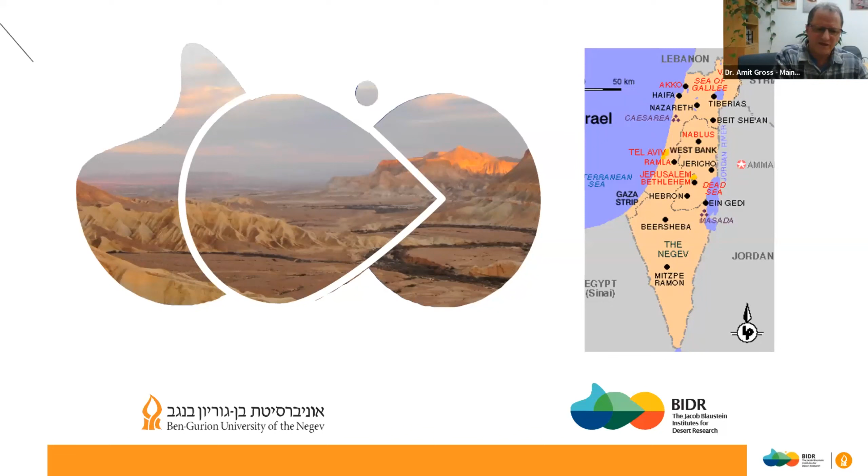The Ben Gurion University has a campus in this area. Our main campus is in Beersheba. It's a major city, but we're a smaller campus, only graduate studies, and it's called the Blaustein Institutes for Desert Research, where we are 3 academic institutes. You can see one is to do with agriculture and biotechnology. The other one that I'm directing currently is the Zuckerberg Institute for Water Research, and then the Environmental and Energy Research, which is doing solar.

And basically, most of our studies are related to food, water, and energy because they're all interconnected. And obviously, greywater is part of it. We're about 300 students currently, about 70 researchers, and only graduate students.

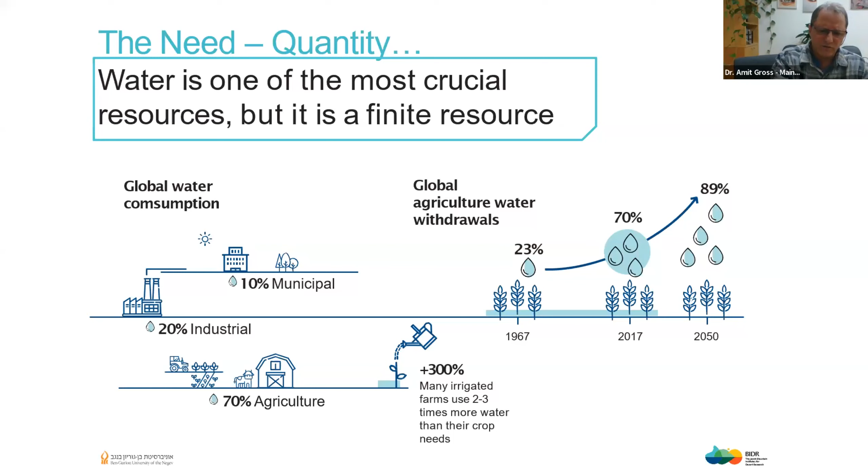I would just mention that there is lots of room for improvement in our current use, and much of it goes with agriculture. And you can see that as of now, we pretty much irrigate about 3 times more than the plant needs. So we're very inefficient. And as you can see in the right-hand figure, the demand by agriculture will be nearly 90% very soon. So much of the effort should probably go into this direction worldwide. So that's about the quantity.

Every few seconds, a child dies from water-related issues. Lack of adequate sanitation, fresh water and fish, the natural habitats are declining, etc. So I know that there is a good chance that many of you are familiar with that, but it's really important to stress this when we go to talk about this topic.

And now I took a slide from Glen Daigger that just talked about the water issues, and basically part of the reason for that is probably that we actually planned all our systems about 100 or 150 years ago, when global population was less than 2 billion. We mostly lived in rural areas and we were lacking modern technology.

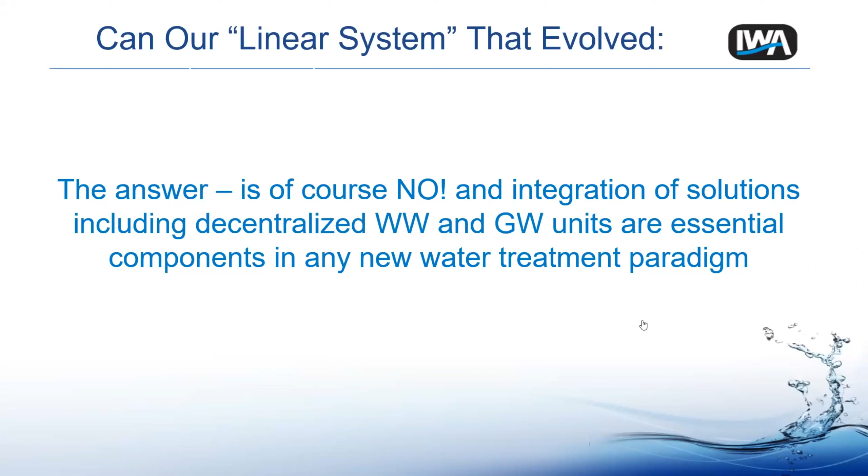Yes, are we connected back? We got lost, I feel. I saw my, am I? Okay, great.

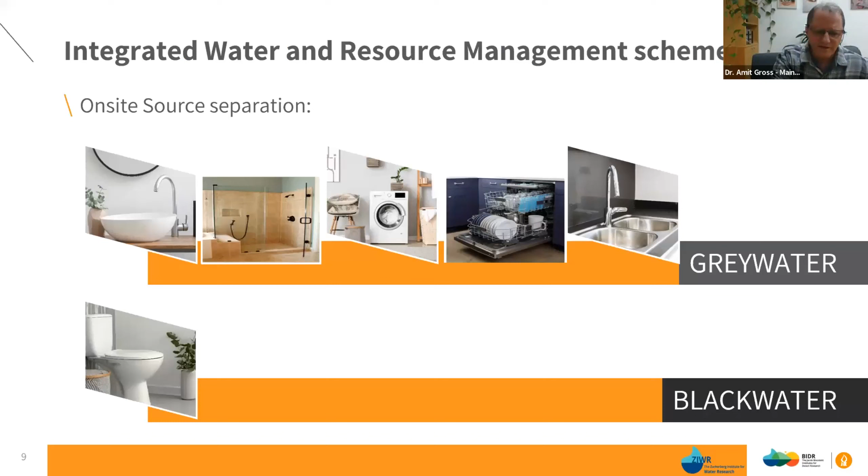So, we're going to go over and see this decentralization, or part of this integrated system, in this presentation. And obviously on the domestic use, we can separate on-site the gray water, which is the shower, basins, laundry, kitchen, dishwashers, yes or no, it depends who you ask and the context. And the black water, which is the toilet water, and that would be the topic of, and we'll go over that.

So why gray water? You surely know, but again, in order for this to be the baseline, I would say that obviously it can save quite a lot of water, maybe up to 50 or 60, sometimes even 70% of the water volume, and less than that of the water cost on a household level. And here I want to mention that I will not get into that much, but it's very different if we're talking about a household or a very small area, or a multi-story building, or a neighborhood. So the sizes are very important, but we'll not touch that too much.

We will relate to gray water reuse on the on-site or smaller scale size of things. And you can see that even when we say gray water, there are different places, and in each place people are producing more or less, typically according to the economy of the country. So you see that in Jordan, which is a country nearby us here in Israel, the average consumption per person is 50 liters of gray water per day, whereas in the US it's almost 5 times more, with 225 liters per day, and in Israel it is about 150.

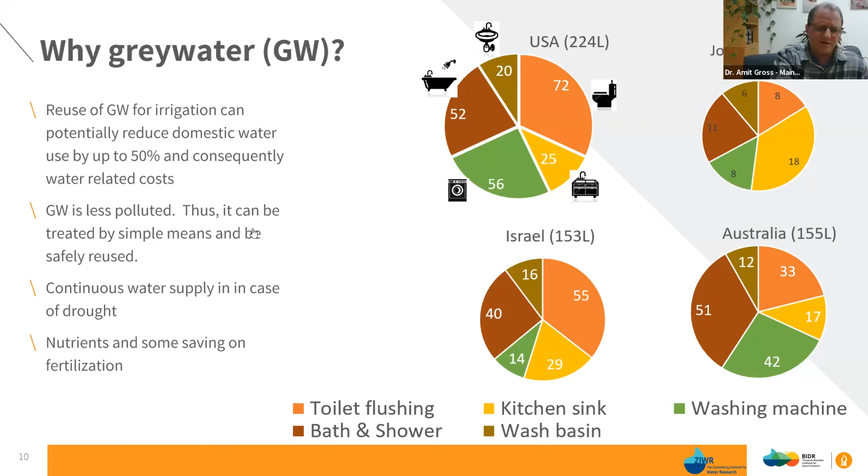So why gray water? It's much less polluted than the full domestic wastewater, because it doesn't contain the fecal matter. It can supply water even in droughts, because we always consume water. For example, if we want to use it for garden irrigation, we may not have enough water in our house or in the country because of drought. But still, since we're going to use it in the home, we can then use the treated gray water in our garden. And obviously it contains some nutrients, and that is another advantage. So these are probably the major advantages. It can save some money if we do it correctly.

But there are quite a few challenges in gray water reuse, and I would divide them into three major ones. I'll start from right to left, and one is physical. I don't know if many of you ever thought about it, but let's assume that you live in a house where the pipes and all the sewage are designed for a certain amount of water, and the flow is designed to contain the toilet, and now we remove 50, 60 or 70% of the water, because we take the gray water away from these sewage pipes. Then what will happen to the excretion? Will they flow to the sewage? So this is one issue, and I'm not going to talk about it a lot today, but I would like you to remember that.

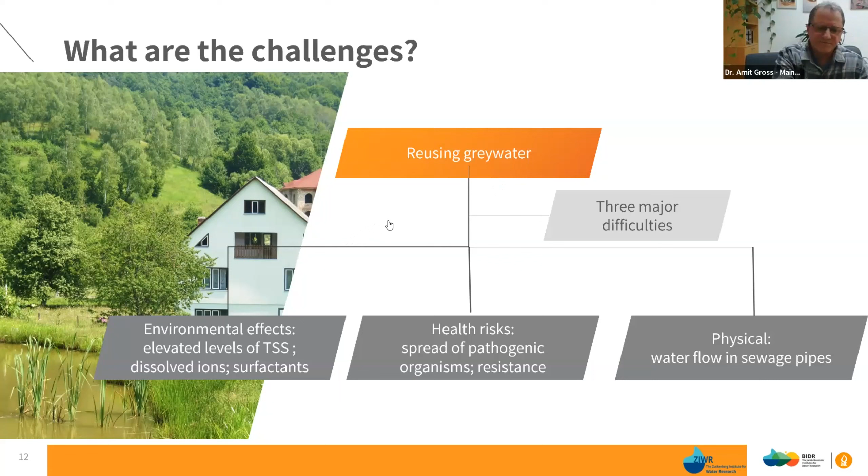So these challenges are out there, and they must be treated very well, I think, before greywater can be reused safely. And that's not the case in many places in the world, but we'll discuss that as we go. I already mentioned that, and I said that we'll not mention it too much, but again, I want to emphasize the difference between on-site or small scale and centralized or larger scale units.

Because in larger scale or centralized wastewater, even if it is greywater, in centralized systems water quality and quantity is pretty uniform. And it doesn't matter if someone leaves the house or there are visitors coming, because overall there is a large number of people that supply wastewater. So the quality and quantity can be predicted quite well.

Where we are working in smaller places, if a family, let's take it as a farm, okay? If the owner of the farm leaves their house for a holiday, then there is no greywater at all. And if visitors are coming to this place, then there can be 5 times more greywater in terms of quantity. And also the quality changes. And that changes on a daily basis and over time. And this is extremely important, and I'll show you later on why.

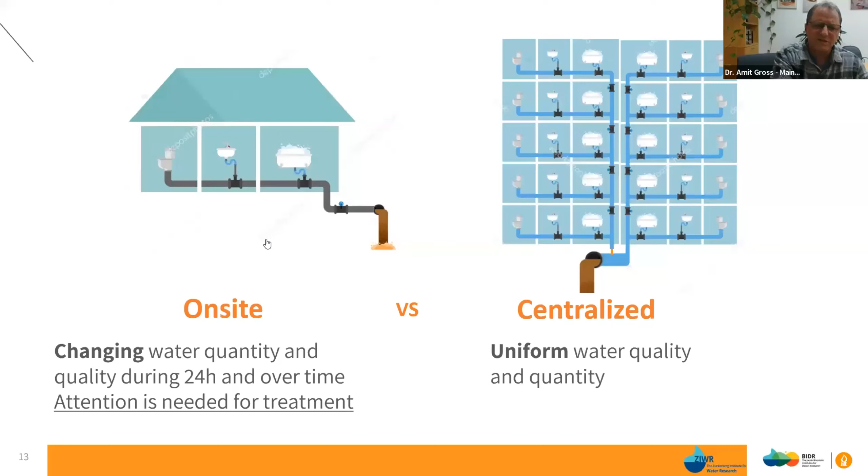So just over a day, the quantities are changing, and this is very important for treatment, because many of our wastewater or greywater treatment systems are biological, and the bacteria, I know that they didn't read the book, but they don't like these changes. They want something uniform, and these kinds of things are quite problematic. So this will be the quantity and how it affects.

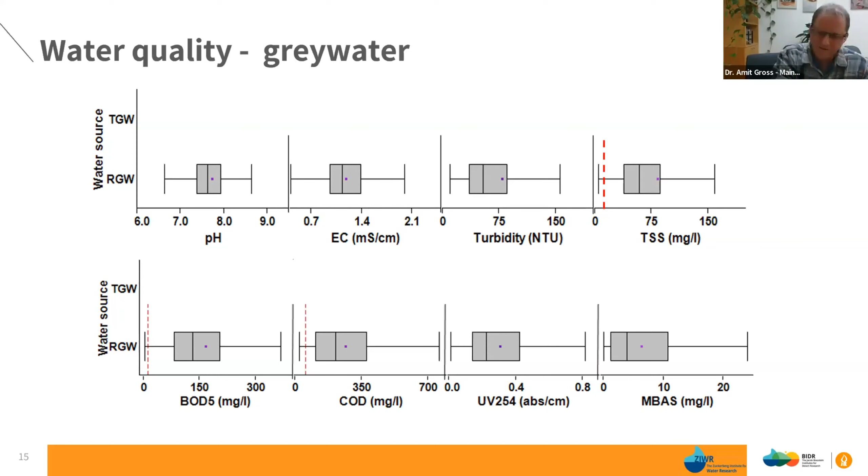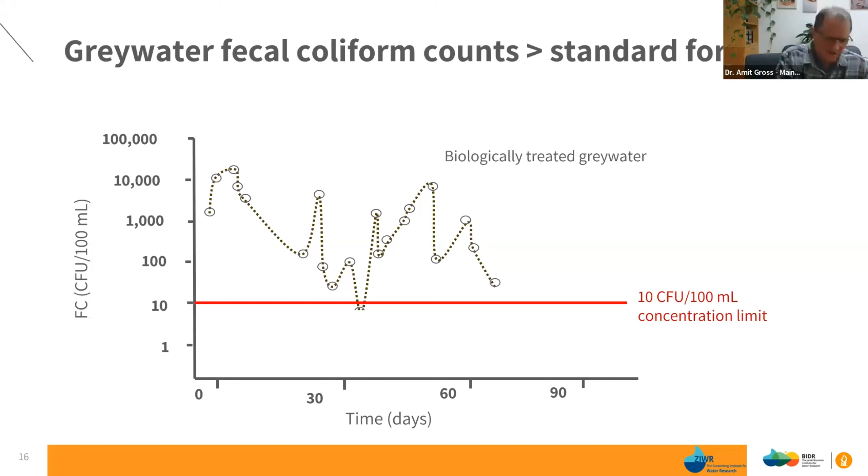The same thing is with pathogens, as indicated here by fecal coliform. And what you can see is that even after biological treatment, but not disinfection, the range of bacteria is anywhere between 10^2 fecal coliform per 100 ml to 10^5 fecal coliform per 100 ml. Again, the difference and the change is dramatic.

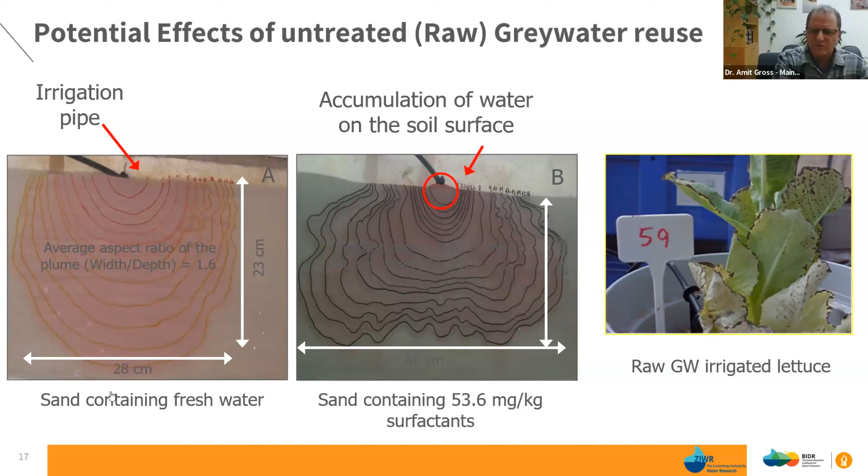So we took the surfactant concentration that we found naturally in one of our studies, and we irrigated with just normal greywater. And what you can see, look at the circle, is the hydrophobicity that was created on the soil. So after a while, the sand became hydrophobic, and that's just because of untreated greywater reuse. And you can see the lettuce that doesn't look very well. We chose lettuce because it's a fairly sensitive plant, but when you use raw greywater, you might have issues with the environment and the plants if it goes for irrigation.

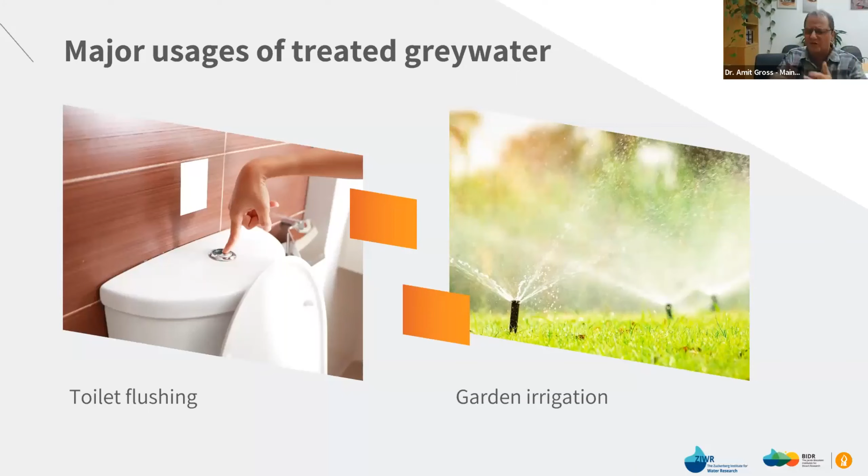I would just remind you that the major usages for treated greywater would be either irrigation or flushing toilets. Flushing toilets would be mainly in the city in a multi-story building, whereas on-site it typically goes into irrigation.

So the conclusion from all that is that greywater must be treated, at least in my eyes, and I know it's not done everywhere. Sometimes we just use diversions, but I'm pretty certain that if we want to reuse greywater safely, we have to treat it, and we have to take into consideration these water quality and quantity differences.

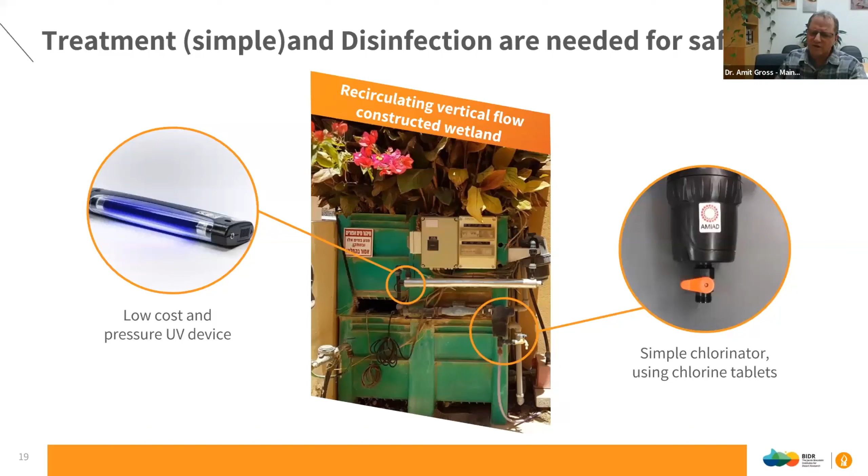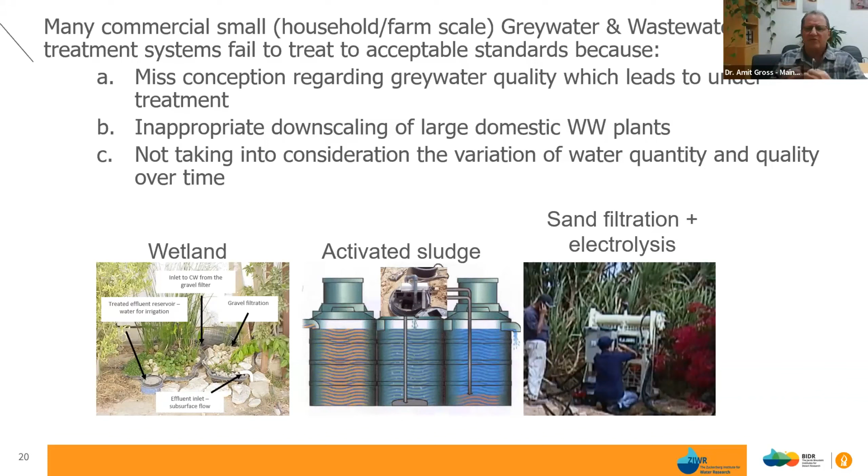So I'll just give this statement. I mentioned that we tested a bunch of greywater systems, wetlands, activated sludge, different sand filtration, etc. But as I mentioned a minute ago, this misconception regarding greywater quality led in the past to undertreatment, and if we had treatment, it often was inappropriate downscaling of large domestic wastewater plants without taking into consideration the variation of water quantity and quality over time. So again, I'm going to show just one system that we studied, actually developed, but there are quite a few others nowadays that took these things into consideration.

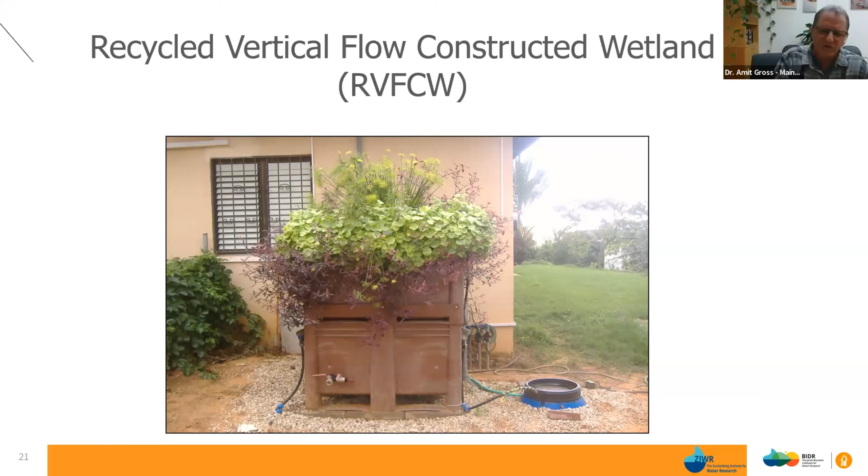What we did here, we called it a recirculating or recycled vertical flow constructed wetland. Basically, you see it's built out of two containers. The upper one has a bed on the upper tank. The tank is perforated with holes, and water trickles like in a trickling filter into the reservoir. The reservoir is filled with the water, and there is a pump that recirculates the water from the bottom tank to the upper part.

To the upper part, and then vice versa, until a certain time that the water quality is good enough and it can leave the system, and then another batch can fit in. By doing that, we can intensify the unit and do the treatment very efficiently, and within a very small size. Now, why is it so important?

I see that the movie doesn't work here. It's like animation, but it doesn't really matter.

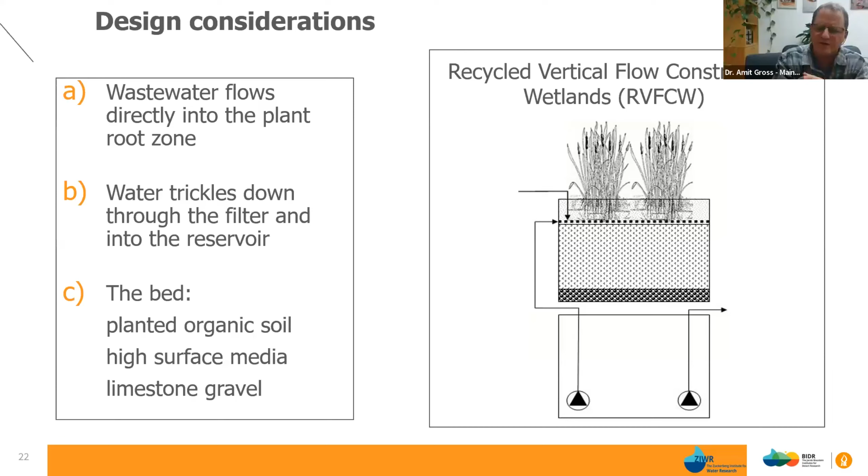Why is it so important? Because you can see here the water flow and how the bottom part is filled up. And what happens here is that there is aeration, which is quite good, and it prevents smells. The plants on the top prevent people from sticking their hands in, and it's aesthetic, like hopefully you saw in the first slide that I showed, in a garden.

And what happened is that whenever we empty this thing, we leave a certain volume in the bottom. And this volume is actually diluting the next batch. So basically, it reduces the fluctuation on the system. As we said, the bacteria doesn't like too much fluctuation.

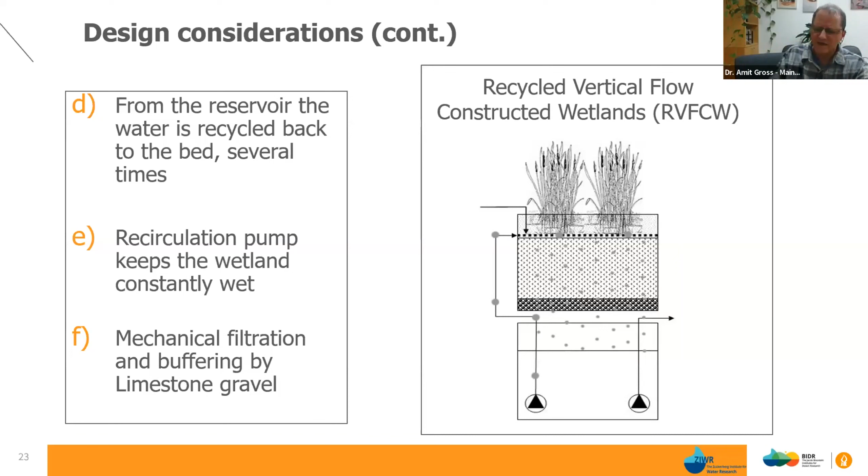Also, if we don't have water for several days, the system does not dry. It keeps going and going because we leave some water at the bottom. So we leave the system alive, again, without many changes. And that actually solved quite a lot of issues, as I'll show you shortly.

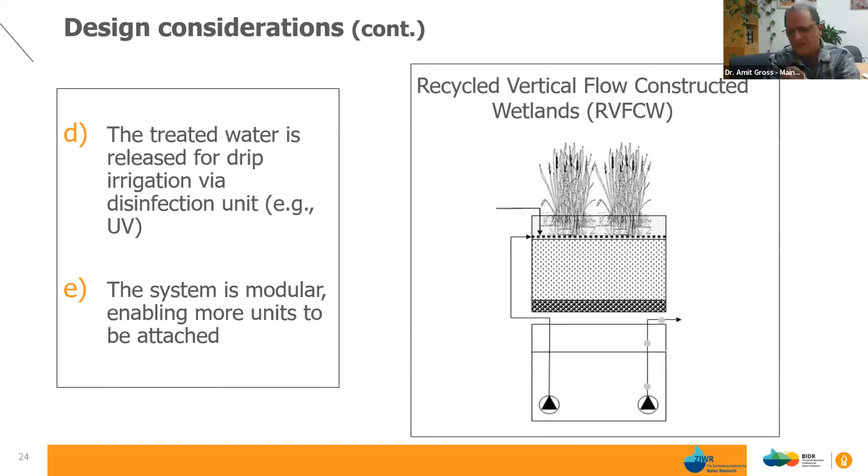Then, as we said, the water leaves the system for irrigation or toilet flushing or whatever. And then we fill up a second batch, as we just said, and that worked nicely. We can then disinfect the treated water as it goes out.

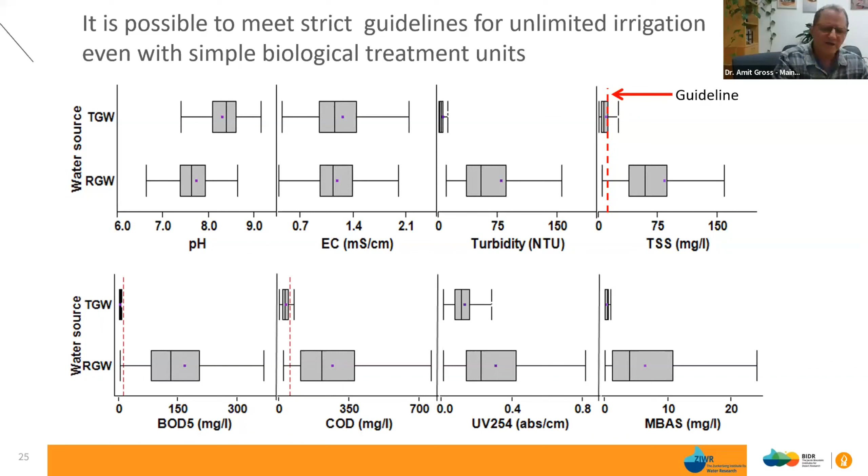And basically, we treat the water at a very high level for unlimited irrigation, and that's with all parameters other than the bacteria. And then we need the disinfection bit, and after chlorine or UV disinfection, the bacteria level goes down. And you saw it's basically two pumps and two containers. That's all there is to it.

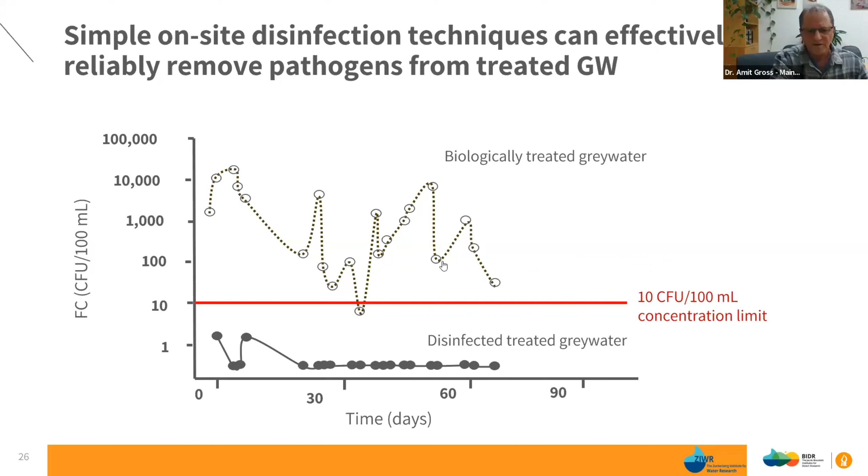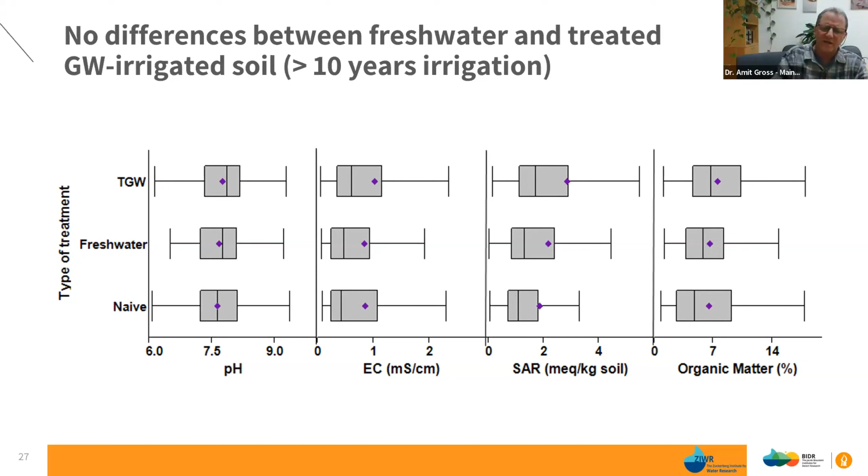We put several of those systems in Piura, actually not too far away from you in Chile, as part of a collaboration with a university in Piura. The same thing we see when we look at treated greywater and freshwater irrigated soil. We see that when we use treated greywater, we do not have environmental impact on the soil because the water quality is quite high.

And when we look at the robustness or the reliability of the system, we see that the mean time between failures, wherever we do it, is pretty much 3, 4 or more months. So we know that if we maintain these systems every 4 months, we do not expect any failures. Actually, we have run these systems now for 15 years successfully, and we know that it's really, really robust.

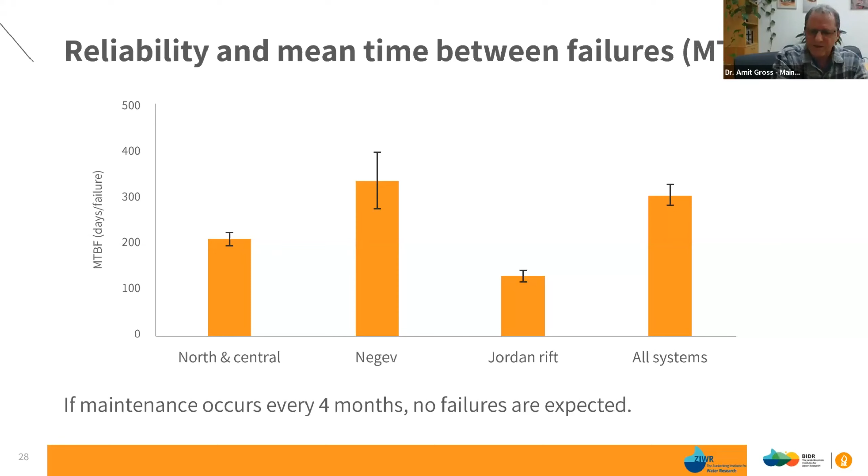So we can do treatment very simply and at very low cost, but it has to be maintained and it has to be done efficiently in order to work. There are 2 more topics that I want to go over very briefly in order to leave time for questions.

And I'll just say that they compared greywater users versus the regular community, and after treatment they found no differences in sicknesses. We did an epidemiological study here, and we found no differences.

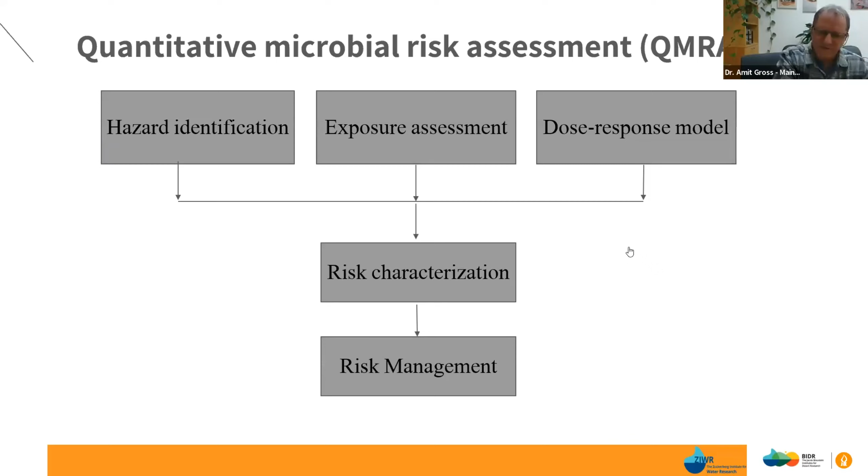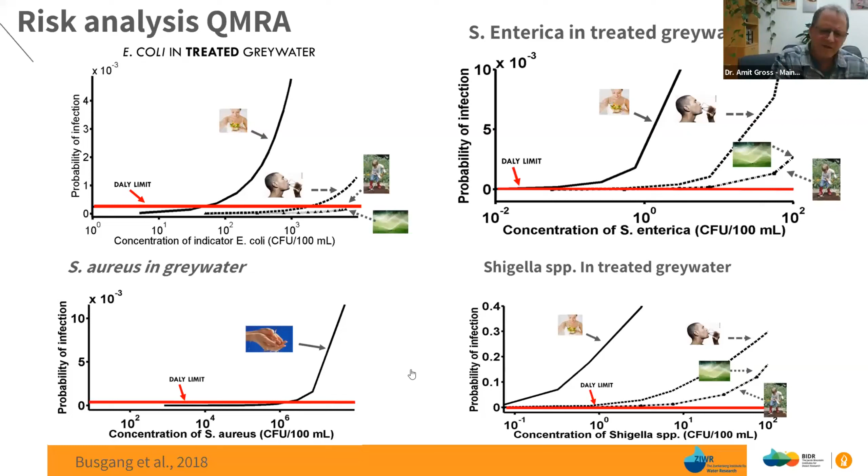But if we look at much more severe bacteria, for example Shigella, the bottom right, you can see that the lines are crossing the DALY limit at a concentration which is less than 1 bacteria. Now, all these bacteria we sometimes find in greywater. So basically, what we say here is that although it is not necessarily risky according to the fecal coliform indication that we usually use, it may be problematic with other bacteria, and therefore we recommend disinfection for greywater reuse unless it's away from people.

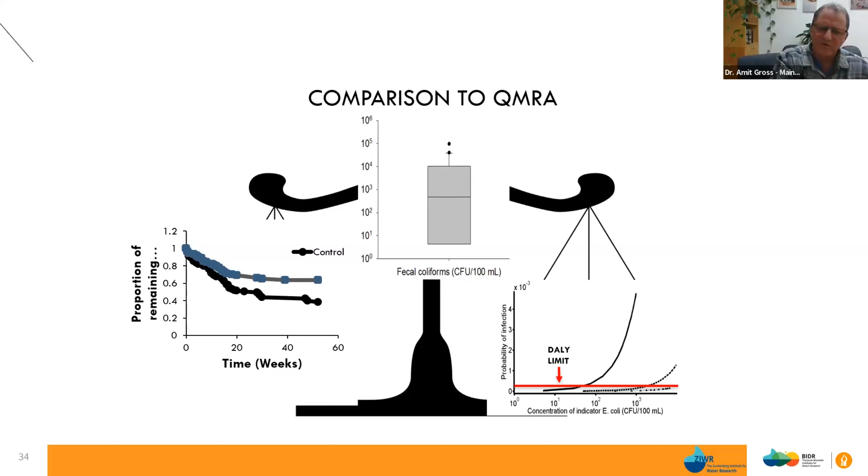And when we compare this epidemiological approach and the quantitative microbial risk assessment model, what we see is basically that the QMRA, the risk assessment model, is much more conservative than the epidemiological study. So if we use that, we're really on the safe side, but we don't necessarily have to use it. We can be more relaxed than the QMRA. So this is like a political issue.

Last, in a couple of minutes, I'll give you the statement and very briefly go over the real data. Greywater may not only save water on a household level or on the level of the user, but it can often be important on a national level. And this is just an assessment from Israel. I'll start with the outcome of the assessment, and then if we have another minute, I'll discuss the causes for that. In Israel, if we had started to save greywater about 10 years ago, today we could have saved nearly 40 million cubic meter per year.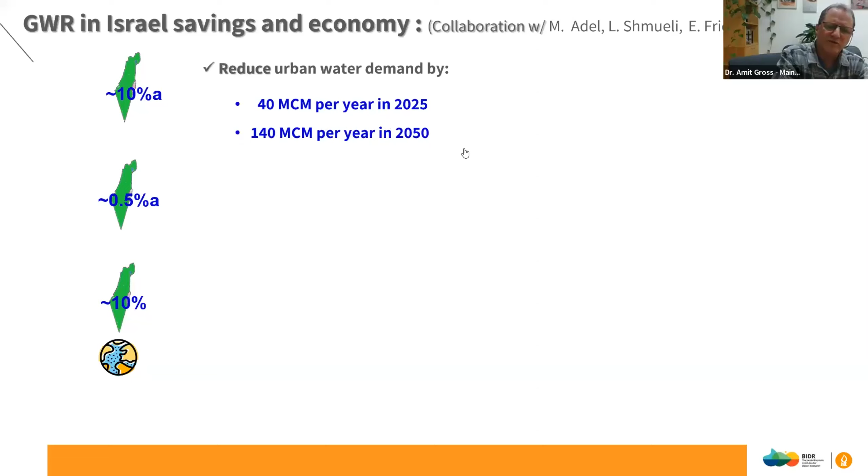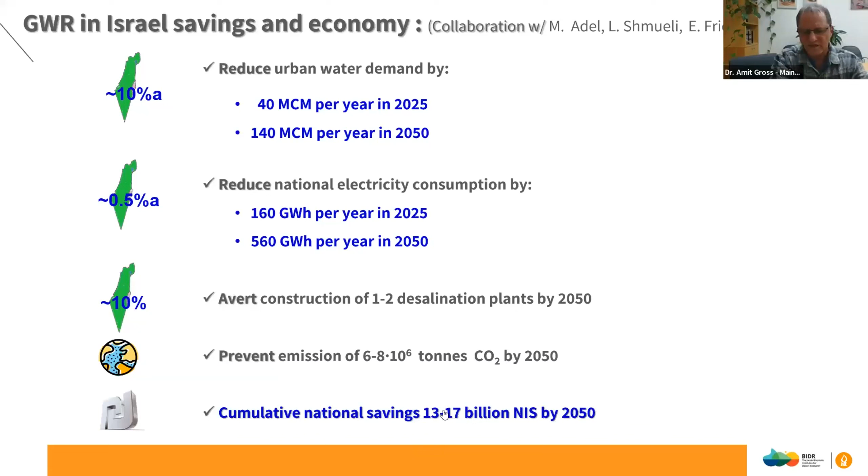And in about 15 or 20 years from now, almost 140 million cubic meter per year. We could have reduced our national electricity consumption by, you see the numbers, lots of gigawatt per hour, and maybe avert the construction of almost 2 desalination plants by 2050, which is dramatic, reduce CO2 emissions and save billions of Israeli shekels; divide by 4 and it would be in dollars. So maybe $4 billion by 2050.

And the reason is that if we start using greywater only on new premises by 2050, you can see that the saving would be around 140 million cubic meter, just because we irrigate or flush toilets without taking new water. In Israel, it's all desalinated water. So basically it would save 2 desalination plants or 1 big desalination plant with all its impact.

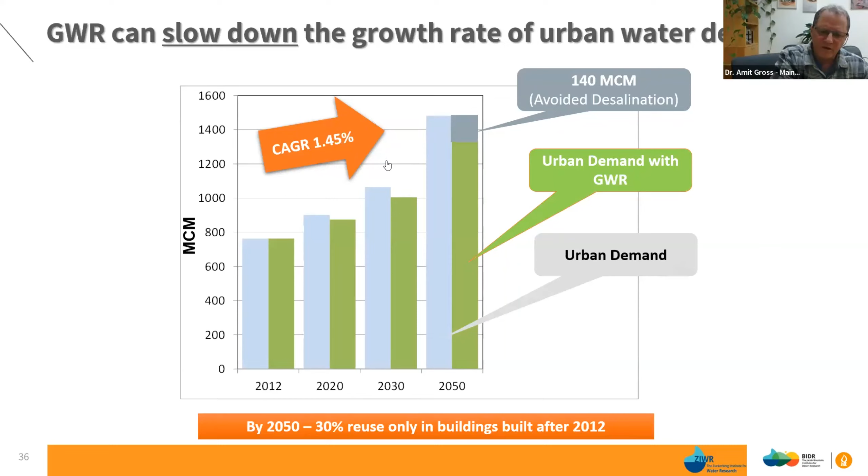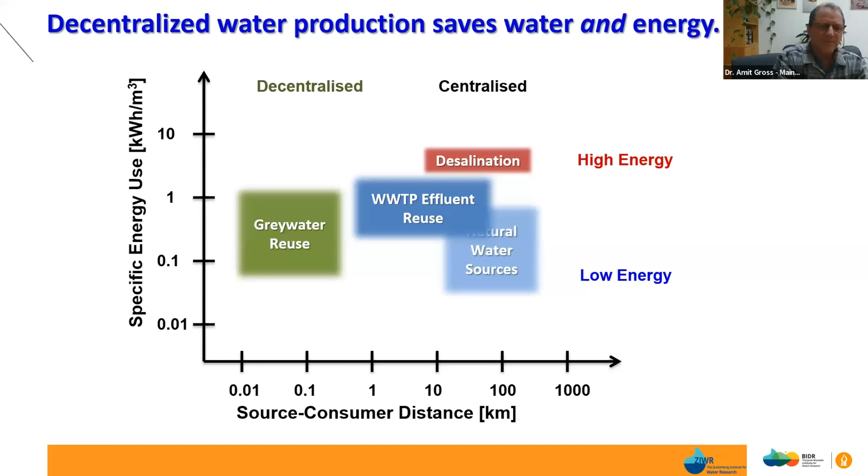And I'll just summarize and say that it is possible to reliably treat greywater by simple, low-cost, low-tech means to very high quality, which makes it an economical solution. If greywater treatment is maintained, the reuse of treated and disinfected greywater is safe for unlimited use other than drinking, and greywater reuse is expected to be part of any new wastewater management paradigm, and it is no doubt a green solution.

And there are lots and lots of people that I should thank along the way, but some of my colleagues are mentioned here, Eran Friedler and Zeev Ronen and others, and many of my students.

I had dozens of students working on greywater, and a nice fellow who donated quite a lot of money and funding towards this research.

As I said, I would like to spend 30 seconds and say that this presentation, I agreed to do it before, but I couldn't ignore it. It's in memory of so many lives that are gone. This war in Israel is very near, you saw the map earlier, it's very close to where we are. About 1,000 people died from the area, of which 100 or so from the university, our colleagues and students, and it's very sad. Much of it was here in the Negev, not too far away from where we live, and nearly 200,000 people are displaced from their homes at this time because of this war. And I wish that all this would have never happened, and it will be over very, very soon.